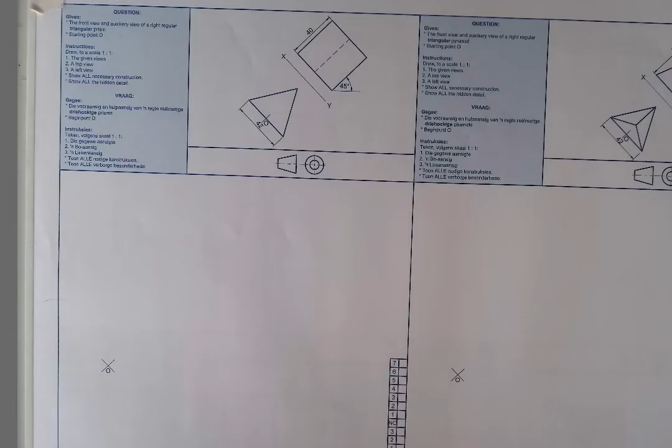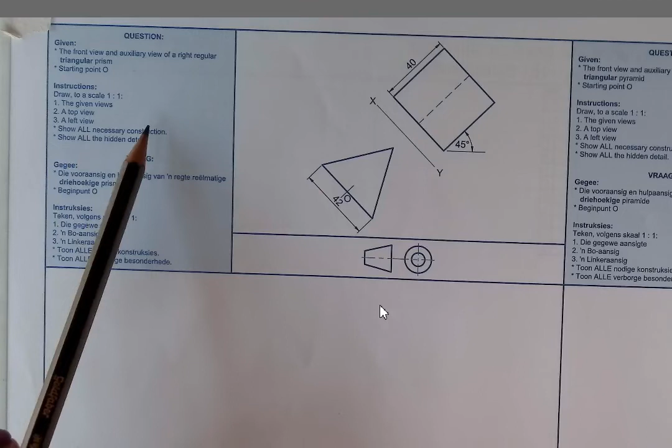Today we will draw a regular triangular prism. So let us look at the instructions. Firstly, we will be drawing the given views, which is the auxiliary view and the front view. And then we will draw a top view and a left view. We must show all necessary construction and all hidden detail. So those are our instructions.

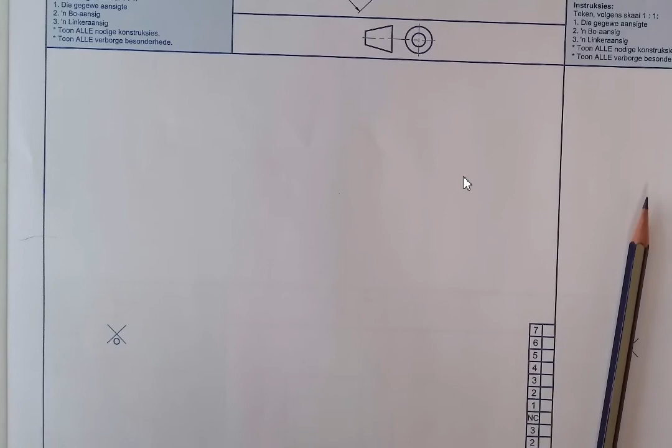And we have the auxiliary view here and the front view. They are drawn and they are sitting at a 45-degree angle. We have a starting point of O. So let us draw what we are given. Using a 45-degree set square, you are going to draw the auxiliary view first. So you're going to take your 45 and then construct.

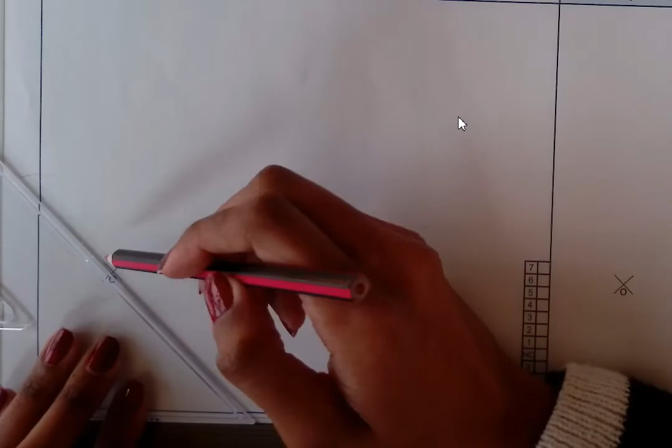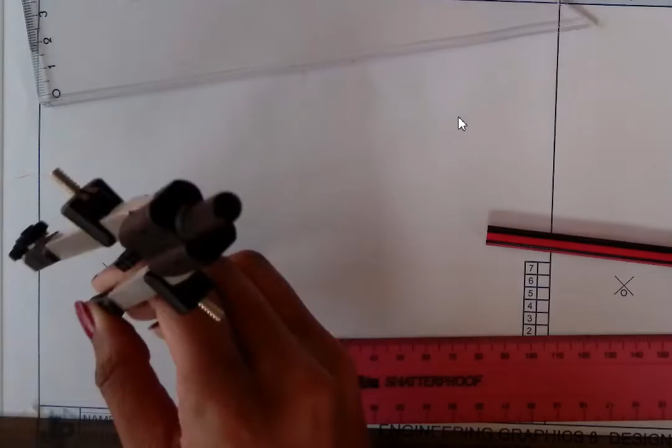Then you will draw the base first. Then once you are done with the base, you will measure half of 42, which will be 21. And then you will mark it on each side of this line. Then once it is marked, you will open your compass to the distance of 42 in order to draw the triangle.

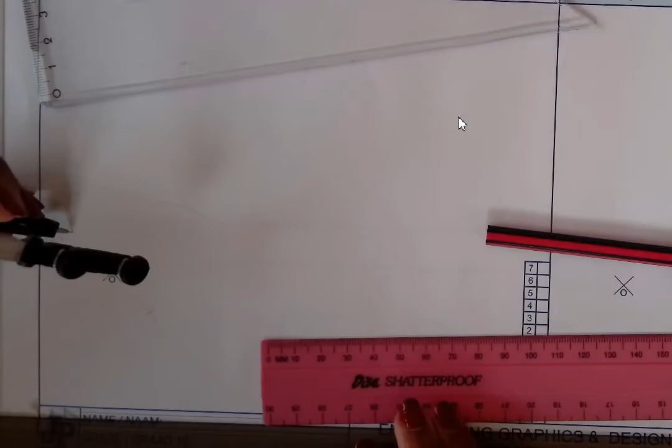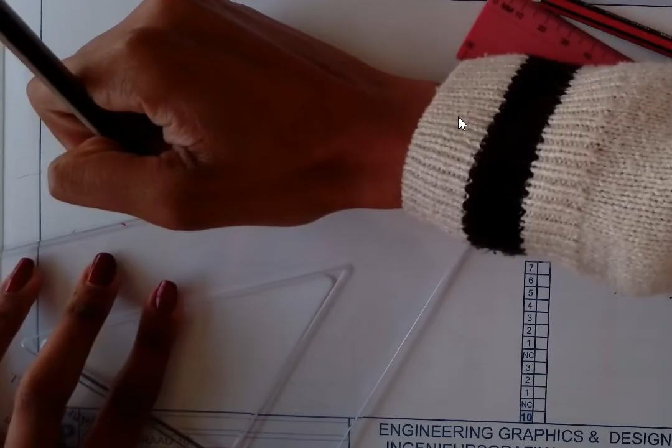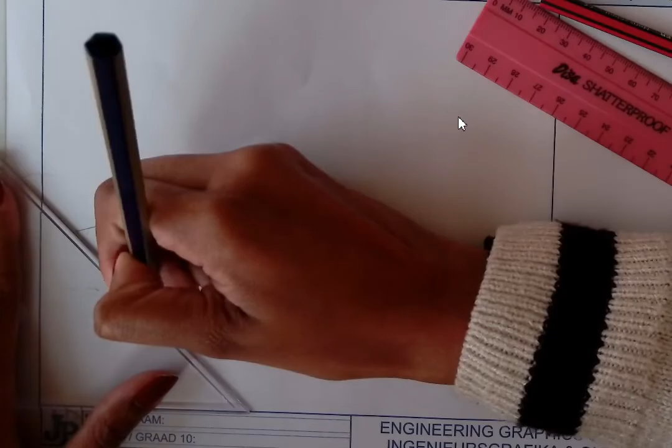Here we are constructing it. Then going to complete the triangle. And to the other side, complete the triangle. Ensure that you outline each and every side of the triangle. Once the triangle is done, we will label our points. So we have point 1 here, we have point 2, and then point 3.

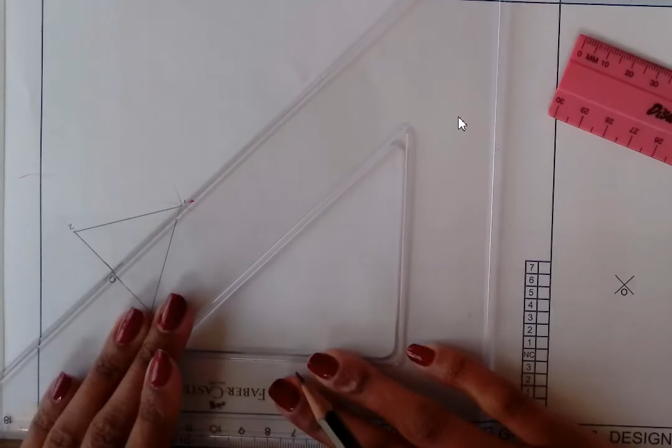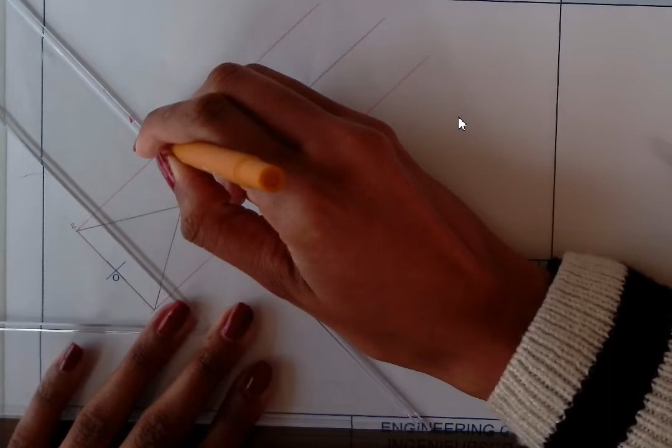And then using a 45-degree line, we are going to project all of these points up. So up, let me use a different color so that it's at least visible. Up, up, and the last one, which is point 2, up. And then once our 3 points are projected up, we are going to measure 10. We measure the 10 millimeters there, and then draw our given XY line. So it must just be long enough to pass the triangle, and ensure that you label it XY, because this is the original XY line that we are given.

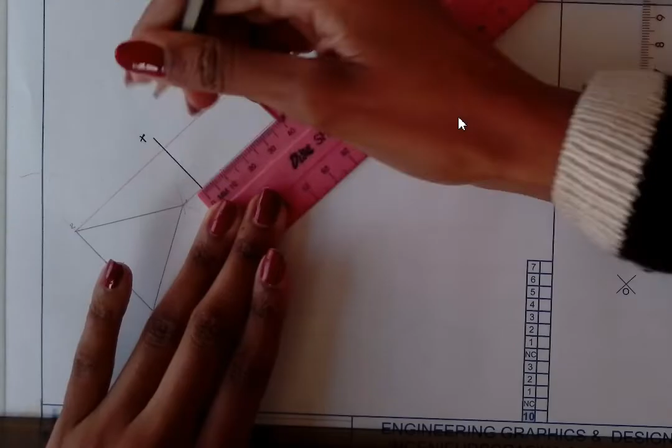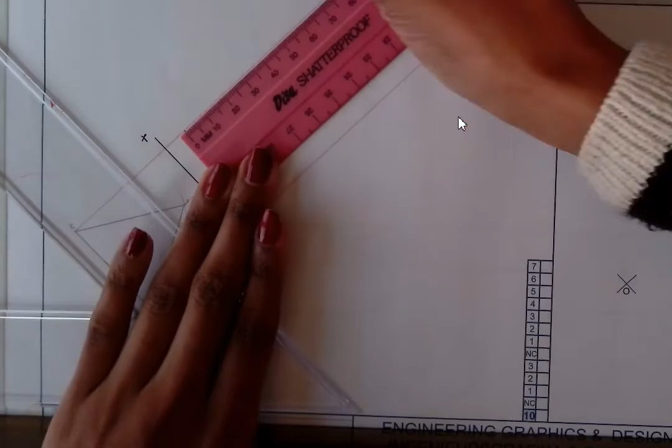After that, we will now again measure 10 millimeters from the XY line in order to start drawing your front view. So that is where your 10 will be. Then you are more than welcome to outline it here. And then its length is 40. You measure 40, then mark it there. Then you can be able to draw the other side of this. You draw it, then outline. So you finish it off here.

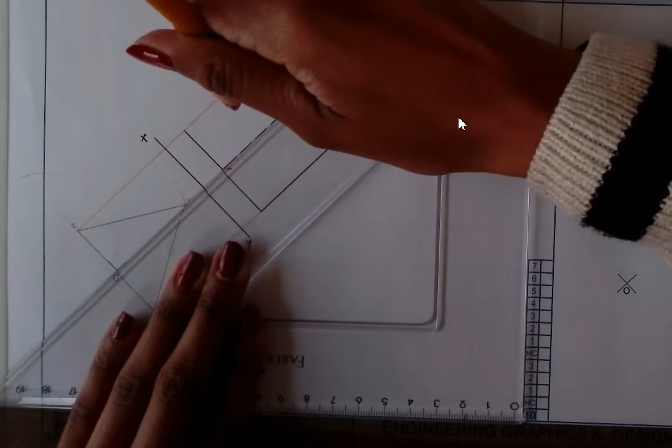Then in the middle, it's hidden detail using a B line. Hidden detail. And then you finish off by closing it off on the other side. Now you have your front view that you are given. So you have completed the first instruction.

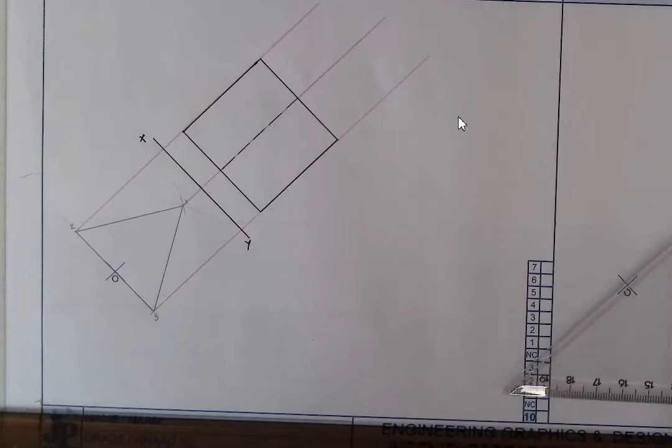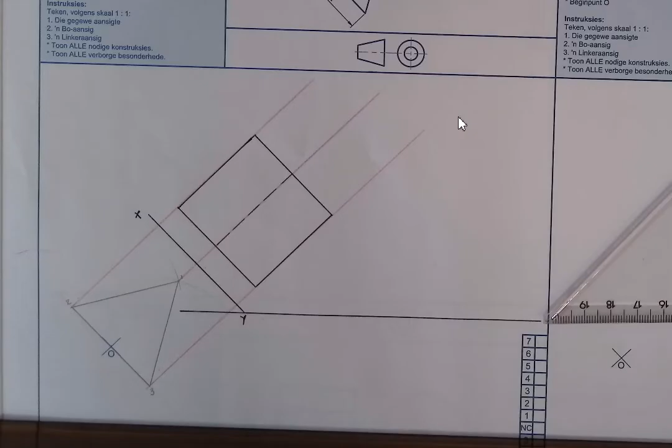The second instruction is to draw the top view. Because we are drawing in first angle orthographic projection, it means that our top view will be below the front view. So just below that, you will draw an XY line. And then that XY line, you will label it X1 and Y1. Let me just zoom in a little here. Yes.

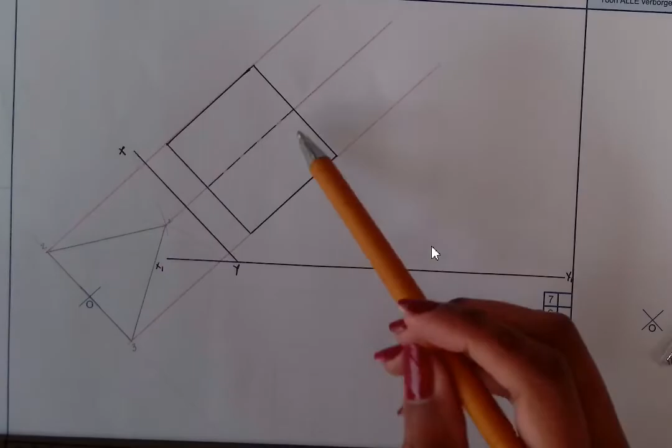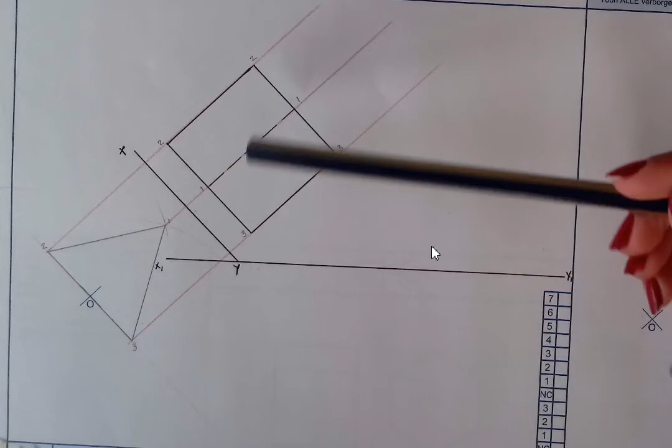Now we're going to label the points that we have on our front view. So because we projected point 2 here, it means we will have 2, 2, 1, 1, and then 3 and 3. So every point that is here on this front view, we are going to project it down. You are going to project each and every point there down.

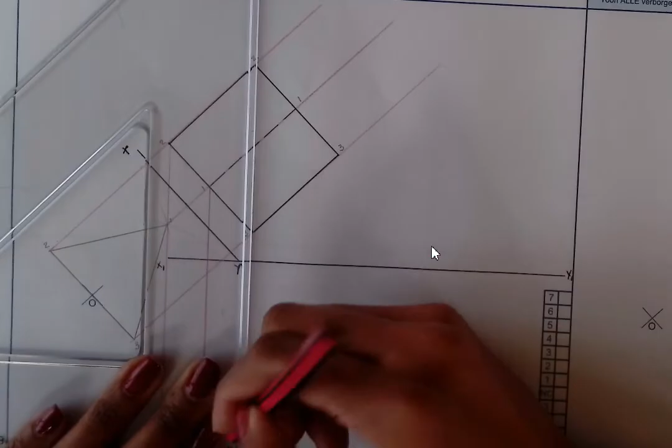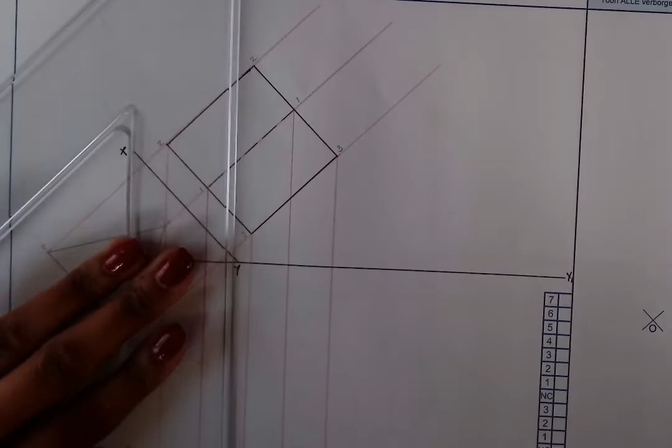So you're going to take this one here down, which is 2, the 1, the 3, the 3, the 1, and the last one that we will project is this 2 here at the top.

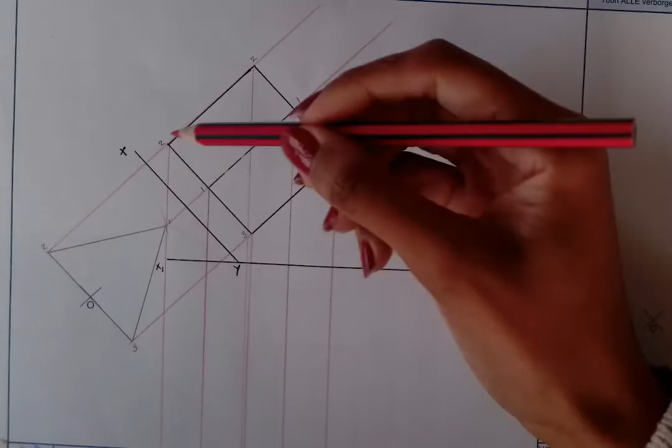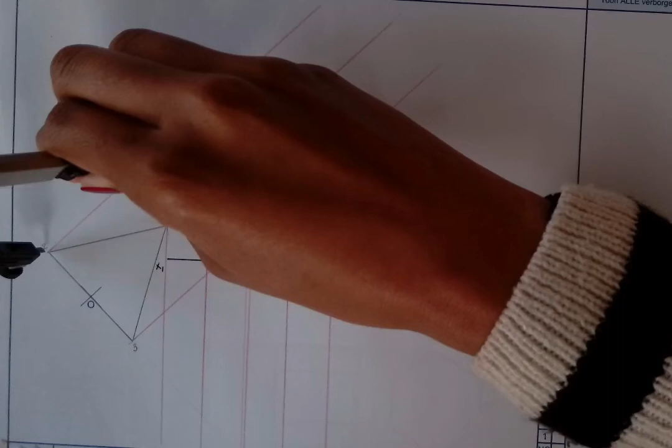Now that we have projected all of our points, we are now going to start tracing them. You trace each and every point from the XY line to that specific point in the auxiliary view. So you're first going to start with 2. Point 2 in the auxiliary view, and then here. And just to save you some time, when you go to point 3 as well, you can see that they are the same distance. So as you mark point 2, you will also mark point 3 using the same distance.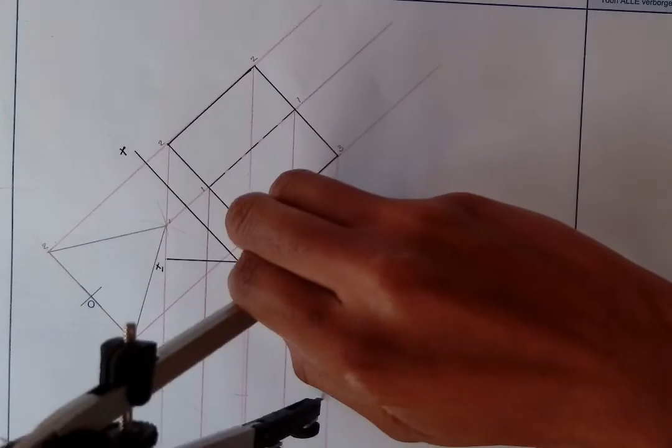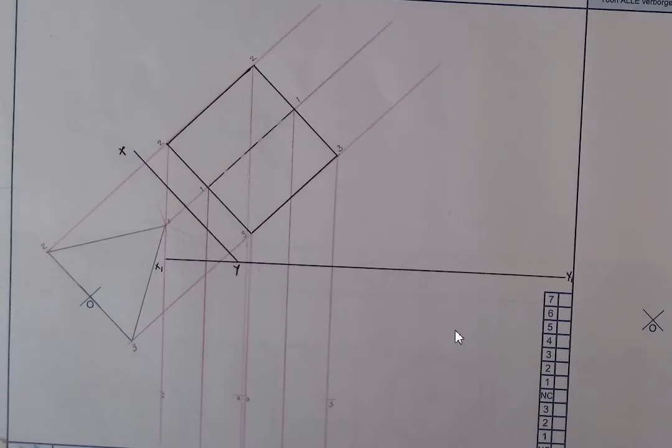So from the XY line to the auxiliary point, it's there. And then we come here, we mark point 2. Point 2, another point 2 there. And then we've agreed that point 3 and 2 are on the same length. So we're going to mark also point 3 as well. And then let's just double check our points. Now we're just going to label the points as well. We have 2 here, 3 and 3. And then we are now going to have to trace point 1.

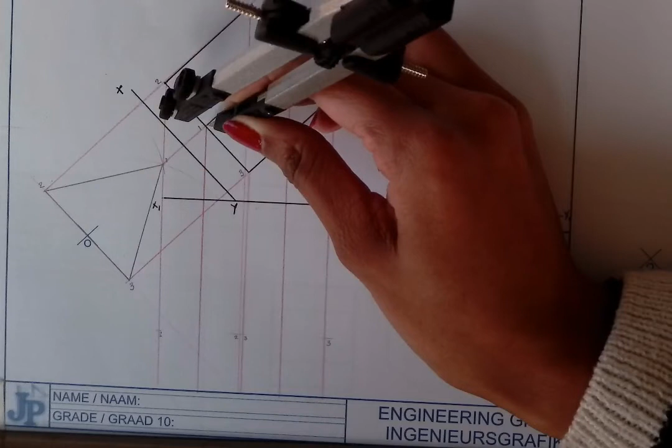So we trace point 1 from the XY line, auxiliary view, point 1, there it is. And then we come here, trace point 1, mark it, and then we have another line for where we can put point 1, then we mark it. And then we just have to remind ourselves that this is 1, this is also 1.

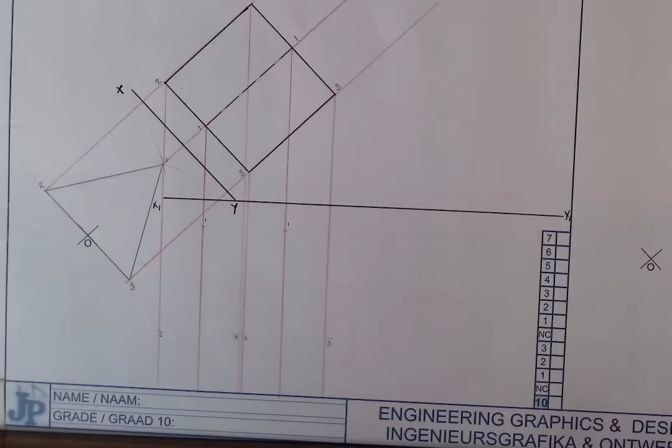Now that we have marked our points, we have to draw our top view. So the top view, I'm going to use these 2 papers to indicate to you the direction that we are looking at the top view from. So the top view is from this direction and that direction. So you are looking from the top.

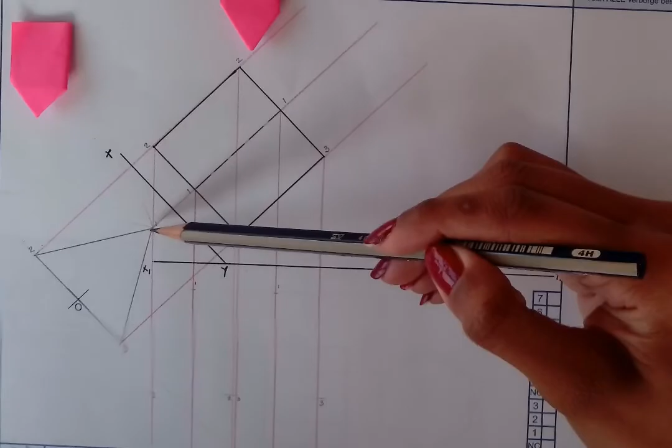So when you are looking at your drawing from the top, you can see that 2, 1 is clearly visible. 2, we have point 2 here and we have 1 here. We also can see our 1s very visibly because of this point. So point 2 and 1 are visible, 2, 1 are visible, and 1 as well. So point 1 and 2 from the top, they are visible.

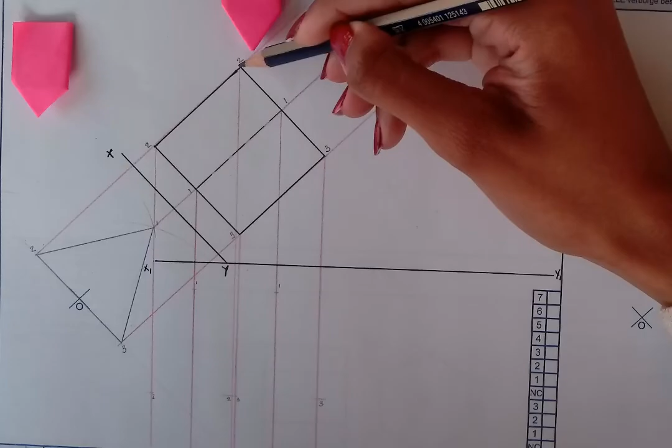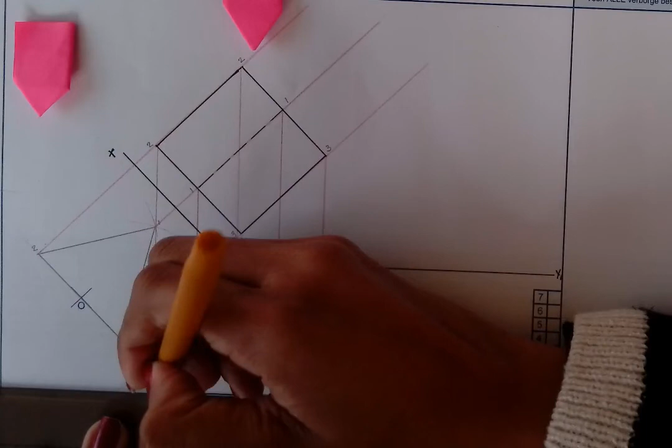And then when you look at your front view again, you can see that from this direction you can see point 2, point 1 and 3. So 2, 3 is also visible and 2, 2 is also visible. So you're going to join that. So using a darker color, I'm going to join 2, 2 and 2, 3.

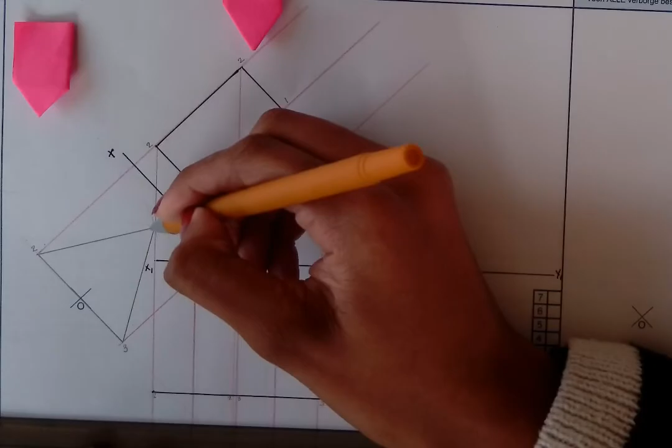So that 2, 3 there, you can see it clearly from the top, and then the 2 and 2, 2 and 2 as clearly visible. And then the 1 here, you can clearly see it. But also when you look at the auxiliary view, you can see point 1 there. Hence you join your 2 points. Hence you join 1 and 1, like that.

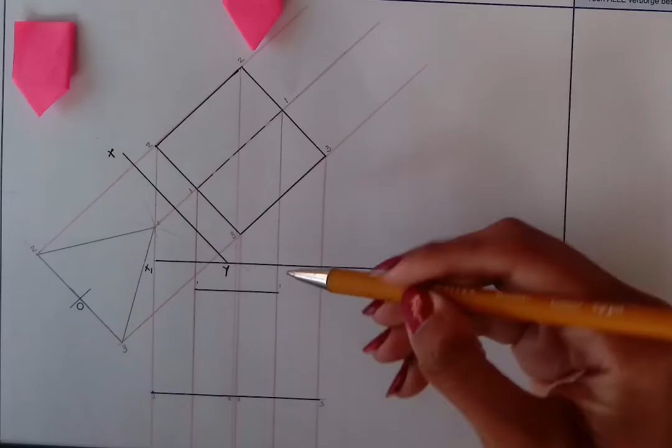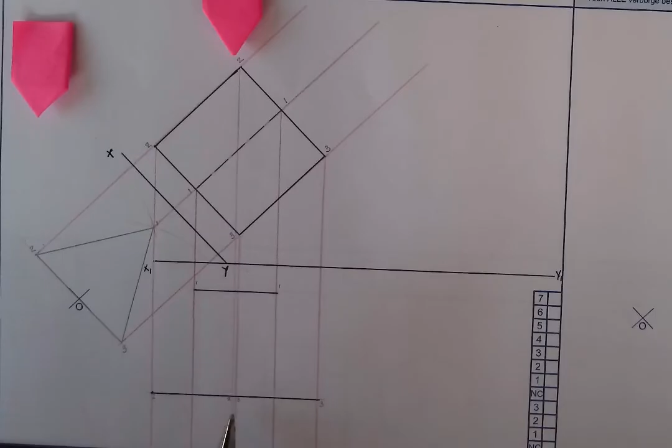So now we need to know which points we are joining next. We go back and look at our shapes. We can see that 1 and 3 are clearly visible in the front view when you're looking at it from the top. So it means that this 1 and 3 here will be clearly visible. But this 1 and 3, you can't see it. It's hidden when you are at the top. So when you are looking at it from this direction, you can't see point 1 and 3. Hence, they will be in hidden detail.

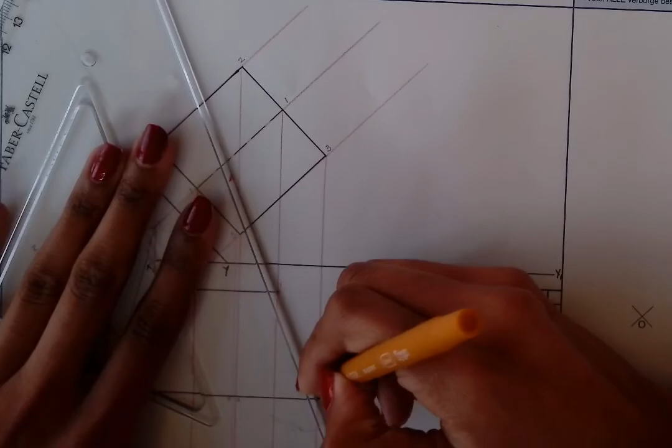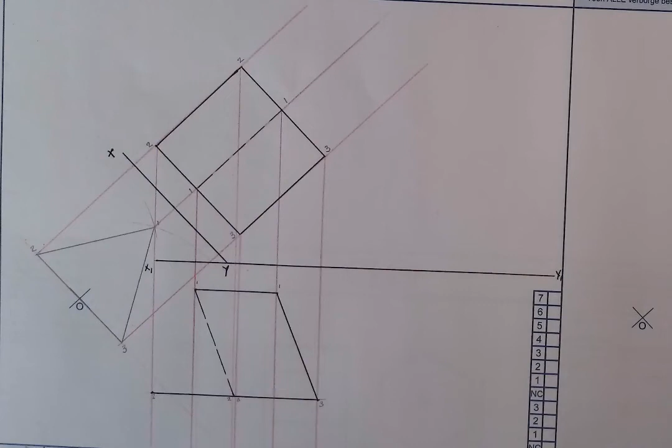So that means 1 and 3, the one on this side will be visible, and then the one on this side will be in hidden detail. And let me draw it so that you can see it. So 1 and 3, clearly visible. And then this 1 and this 3 are in hidden detail. So I'm going to draw them in hidden detail. And now when we are done, we are going to trace the last points.

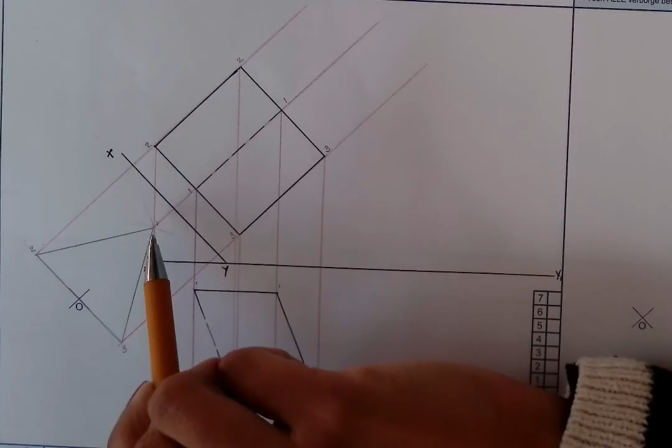This is 1 and 2. This 1 and this 2, which is 1 and 2. On the auxiliary view, we can see point 1 and 2 clearly. Also, this 1 and 2 is clearly visible. So on this side, we are looking at 1 and 2. So they are going to be in solid lines, which is an A line.

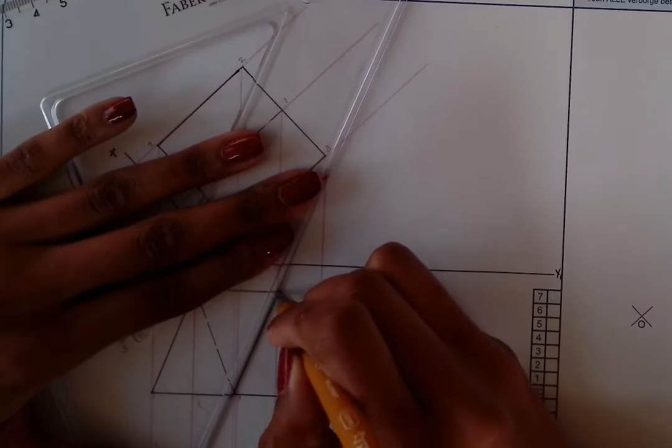And then also this 1 and 2 is also pretty visible from the top view. So we are going to make it more visible there. And then you will have your view.

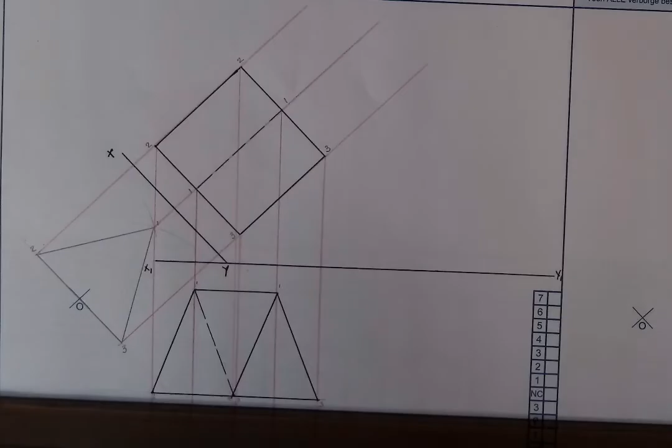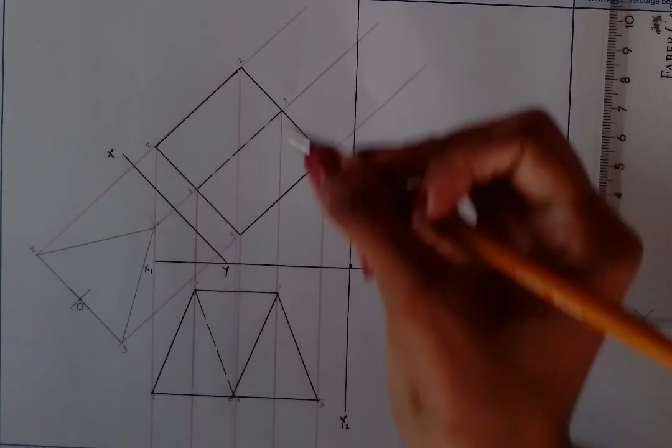Now that we have our top view, we are going to draw the left view. The first thing that we have to do is to draw our XY line. So you will measure 10 here on this XY line, and then you will draw a vertical XY line too. So it will be Y2 and X2. And then we will have our 45-degree line here.

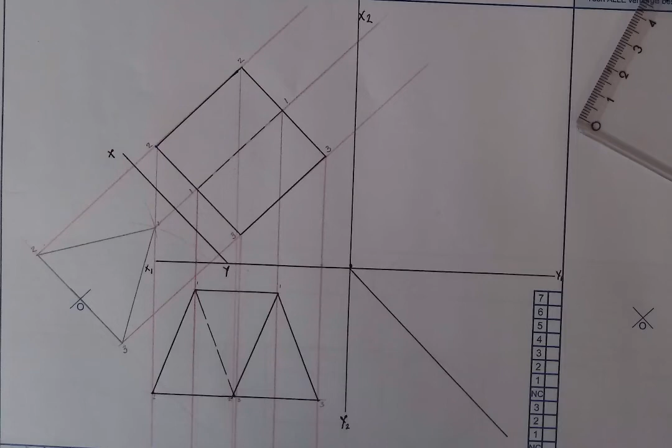Now that we have our 45-degree line, all that is left for us to do is to project the points. So how do we do it? In the front view, every point that is there, we are going to project it to the left view. So point 2, point 1, point 3 here, the 2 at the back, point 1 here, and point 3 once again.

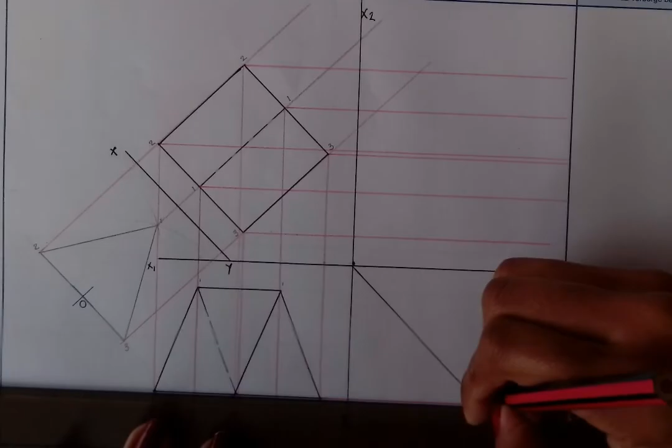So now we will project this. We will project from the top view. So we will take the 2, 3 line, which is the base, and then also the 1 line, which is at the top. And then we are going to project it up.

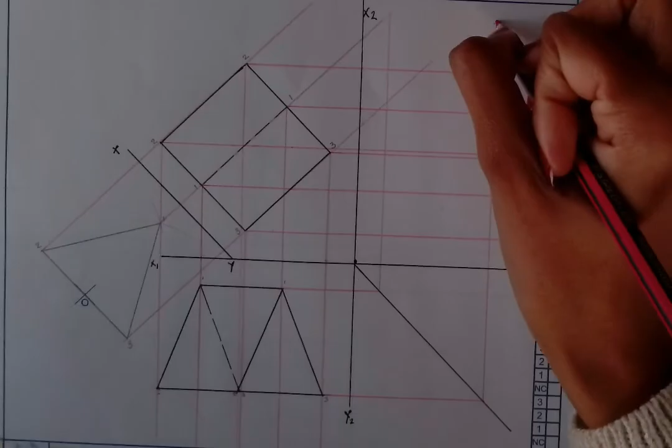So here we know that on this line, we're only going to have 2 or 3. And then here, we're only going to have 1 on this line. So now let us trace the points properly. Let me zoom in so that you can see what I am doing. Zoom in once more, just so you can see the lines properly.

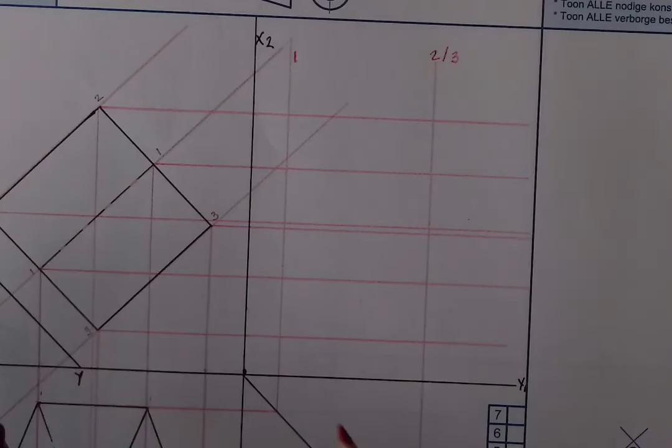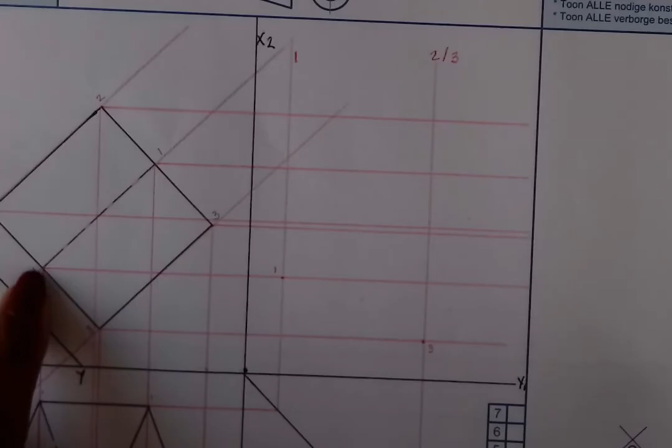So now we start at 3. So we have point 3 here. We know that point 3 will be somewhere on this line, so we will mark it here. So we have 3. And then we have 1. 1 will only be here, so we will have point 1 here. Then we will write it to be 1. And then we have another point 3. Go to the back line, and then it will be here, which we will write 3.

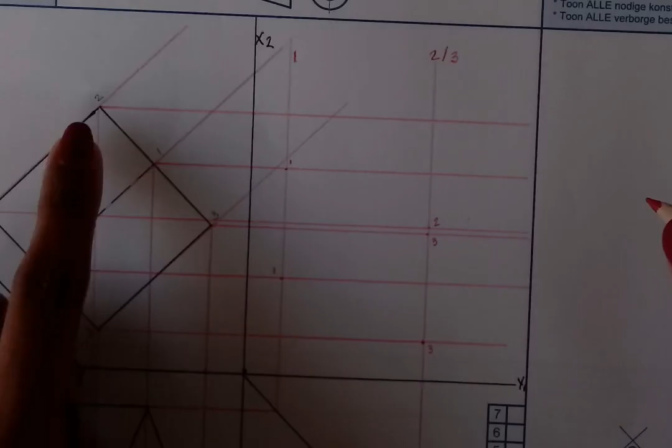And then point 2 also on the back line, it will be here, point 2, and then 1, first line, which is 1, and then the last point, which is point 3, will be here. I hope you are able to see the points. Now we will join our points again. So basically your left view is going to look similar to your top view. So we can see that.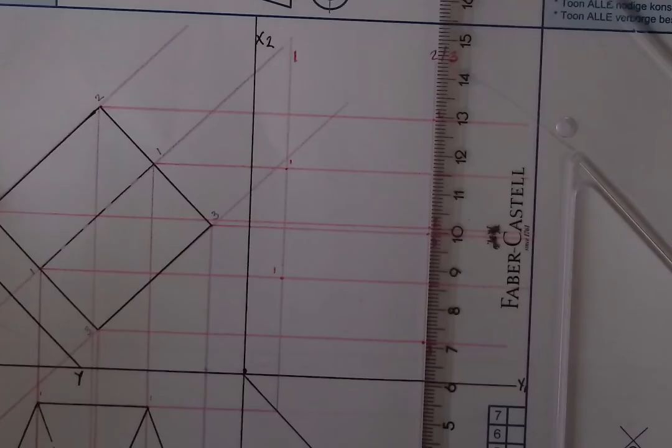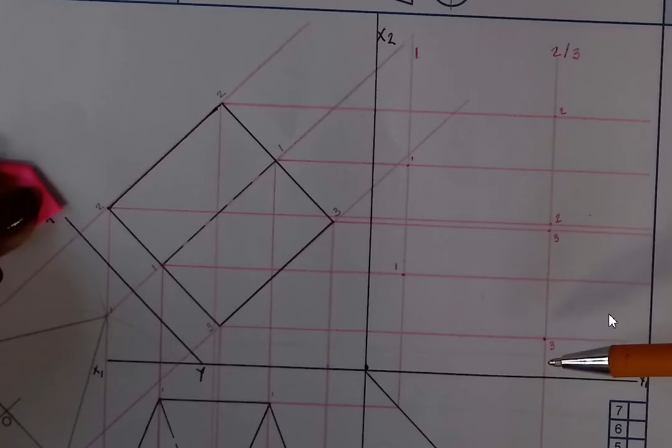Let us look at our drawing. When we are looking at it from this direction, we can clearly see 2 and 2. Point 2 and 2 is clearly visible. Because we are on the left, we can also see 2 and 3. So 2 and 3 clearly visible. So it means that you're going to outline 2 and 2 and 2 and 3. So it means the back line, all of it will be solid. All of it a solid line.

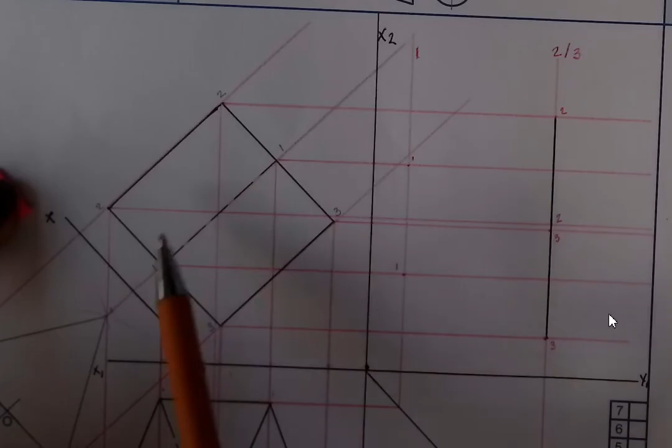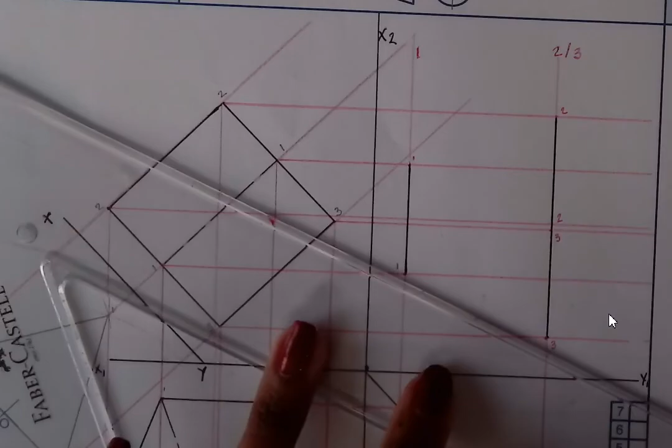And then we come at it again and we need to figure out how we are seeing this. But we can see that when you are standing here, you can see point 1. Point 1 is also visible there. So you can see point 1 here, you can also see point 1 there. So it means your ones will be joined again, like that. And then 1 and 3, this 1 and 3 here. 1 and 3 clearly visible when you are standing from this direction. So it means you have to outline 1 and 3.

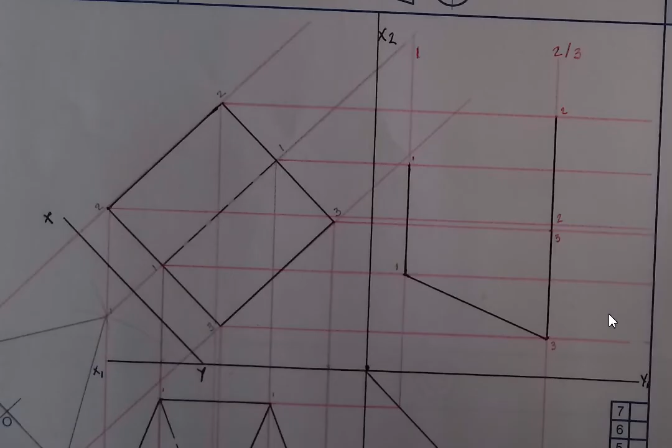You have to outline 1 and 3, and then on that side, let us see what we can see. Then you have your 1 and 2 here. So 1 and 2 still very much visible. So now let us figure out. Let me just add your 1 and 2 here. And then inside we need to know which one is hidden and which one is not.

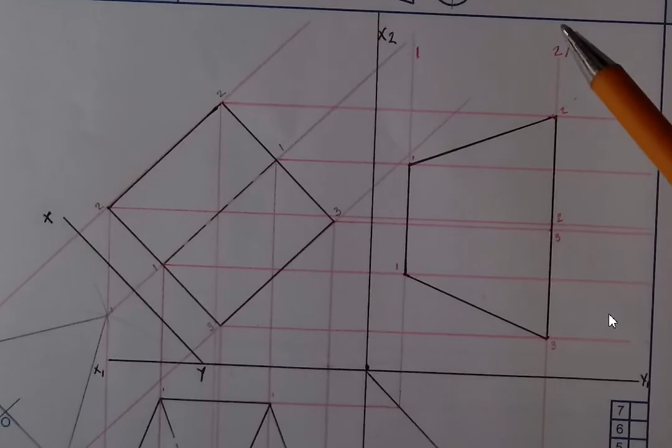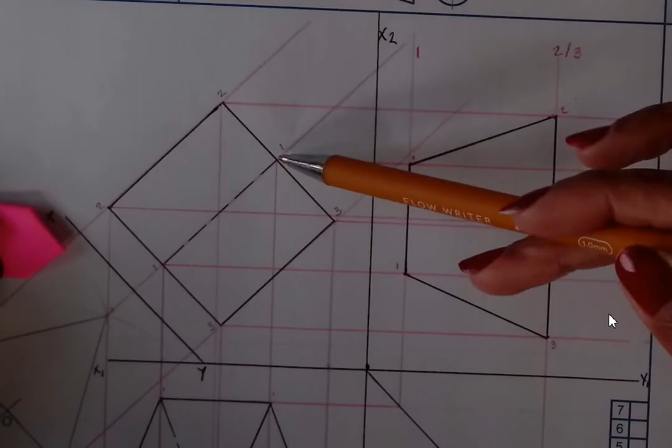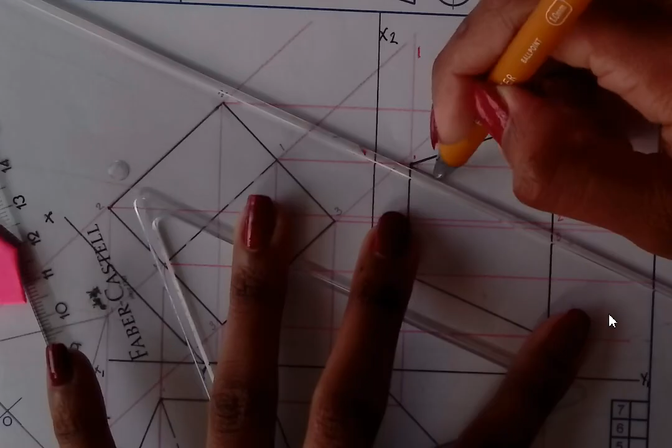So we are going to look at 1 and 3. So we have this 1 and 3, which is now hidden, as we can clearly see. The 1 and the 3, you are not able to see it properly this side. So this line of 1 and 3, you won't be able to see it. Hence, it will be in hidden detail, like that, and then you will have 1 and 2, this 1 and this 2 here, clearly visible.

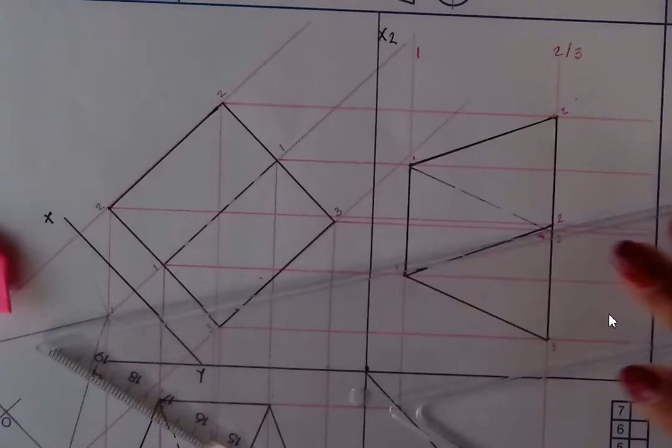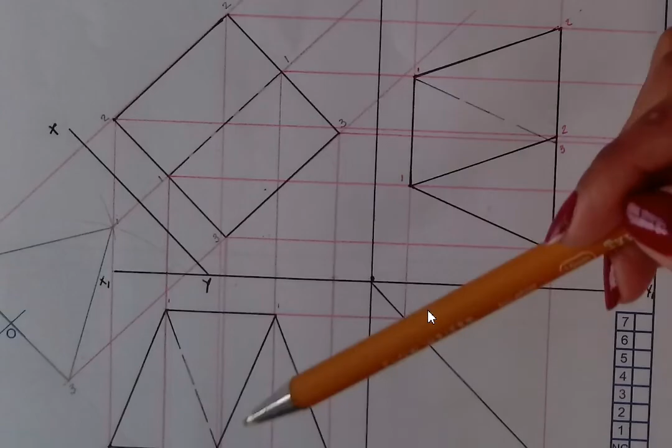So we see that. Now let us look at our drawing fully. There are things that I would like you to notice. You can see clearly here that 1 and 3 was hidden detail, and the same thing is happening in the left view. 1 and 3 are in hidden detail. So to save time, you must just draw it exactly as you saw. That's why I said that when you draw the left view, it will be the same thing as the top view, just facing a different direction, and it is clearly visible in this drawing.

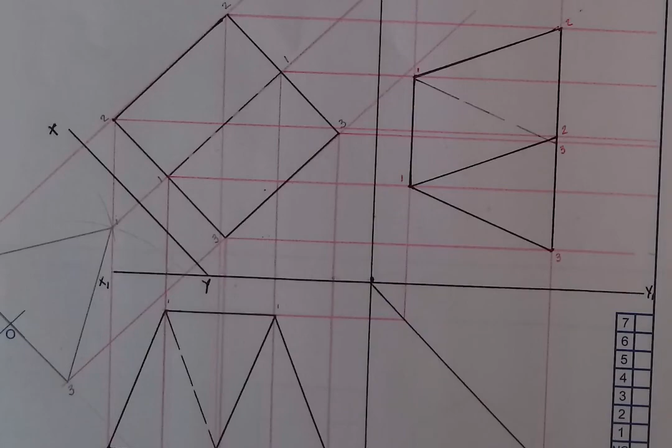Please do this page and try as much to finish it. I hope that you will be able to do it. So this is our page 75, which is the right hand side of it, and this is the full drawing. So you drew the auxiliary view, you drew the front view, and then the top view, and then the left. So the left view, you no longer need to project from the XY line. You can simply use the points that you are given, the 45-degree line, and just start projecting and tracking points from there.